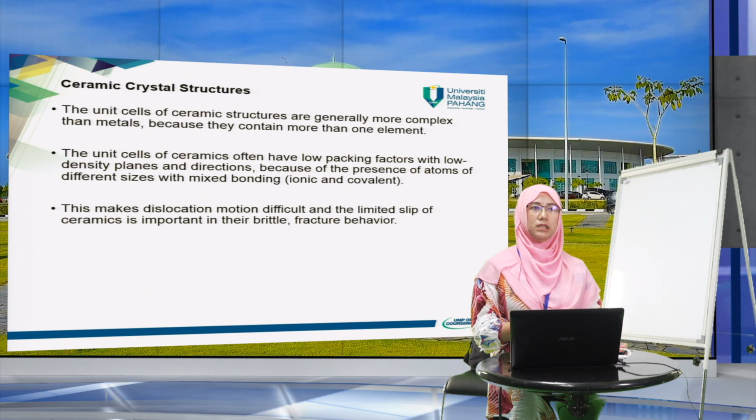As for the ceramic crystal structures, the unit cells of ceramics are generally more complex compared to metals, because they contain more than one element. The unit cells of ceramic often have low packing factors with low density planes and directions because of the presence of atoms of different size with mixed bonding, ionic and covalent. So this makes dislocation motion difficult, and this limited slip makes ceramics brittle.

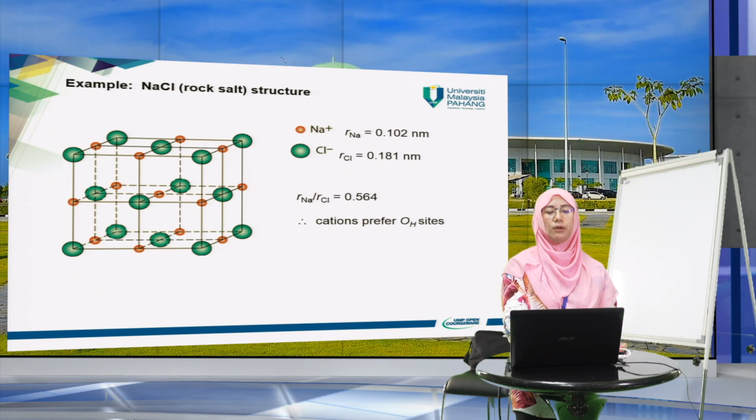Okay, this is an example of the sodium chloride structure. As you can see here, we have two different types of atoms in the unit cell. Another example, we have calcium fluoride, with cations in cubic sites, and also perovskite, a complex oxide. As you can see, we have three different atoms in the perovskite.

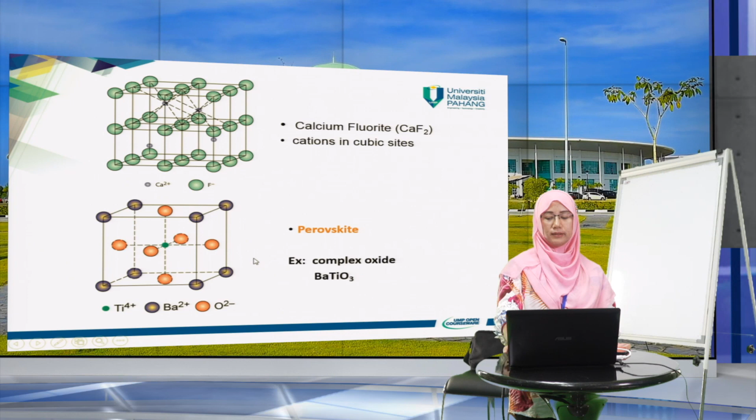General properties and applications of ceramics. Ceramic is brittle, has high strength and hardness at elevated temperature, but low thermal and electrical conductivity. They are sensitive to flaws, defects, and surface or internal cracks. So in ceramic materials, the cracks grow through grains.

Ceramics fail by brittle fracture without the formation of necking or any plastic deformation. The process of brittle fracture consists of the formation and propagation of cracks through the cross-section of materials in a direction perpendicular to the applied load.

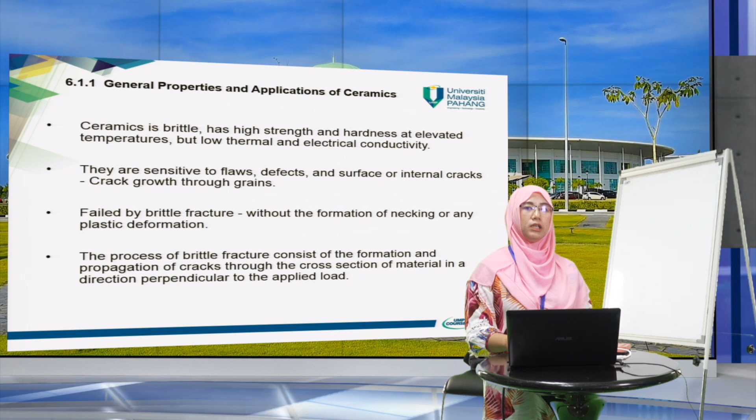Types of ceramic, properties and applications. Oxide ceramics: there are two major types of oxide ceramics, alumina and zirconia. Alumina, also known as aluminium oxide, is the most widely used oxide ceramic. It has high hardness and moderate strength, and is used for electrical and thermal insulation and in cutting tools and abrasives.

Zirconia, also known as zirconium oxide, has good toughness and good resistance to thermal shock, wear and corrosion. It has low thermal conductivity and a low friction coefficient. It is used for dies for the hot extrusion of metals and zirconia beads.

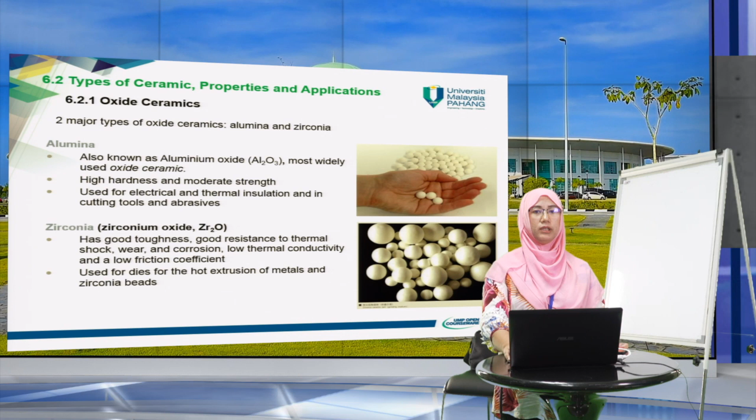Silicate ceramic. Silicates are primarily composed of silicon and oxygen, the two most abundant elements in the Earth's crust. The bulk of soils, rocks, clays, and sand come under the silicate classification. The most simple silicate material is silicon dioxide, also known as silica. So we have oxide ceramics, and we also have silicate ceramics.

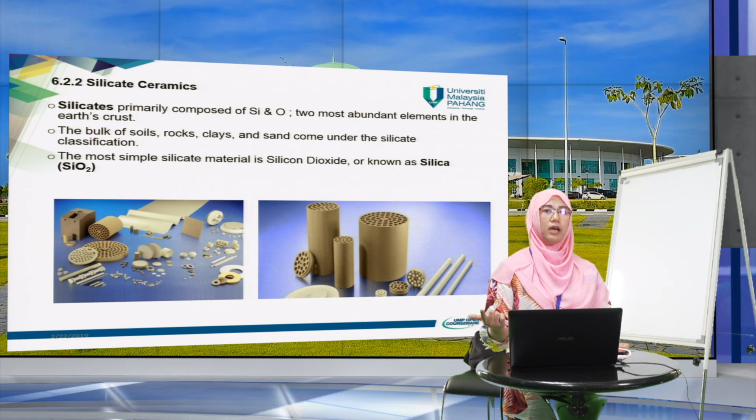Glass, yeah? Glass we categorize under silicate ceramic. Glass is a solid substance with an amorphous structure containing at least 50% of silica. Physically, it is hard, brittle, has resistance to electricity and heat transmission as ceramics, but is usually transparent. So glass has a smooth, non-porous surface which is resistant to chemical attack.

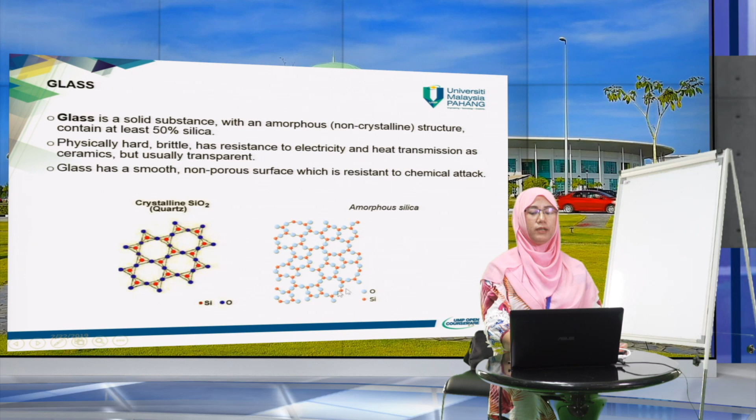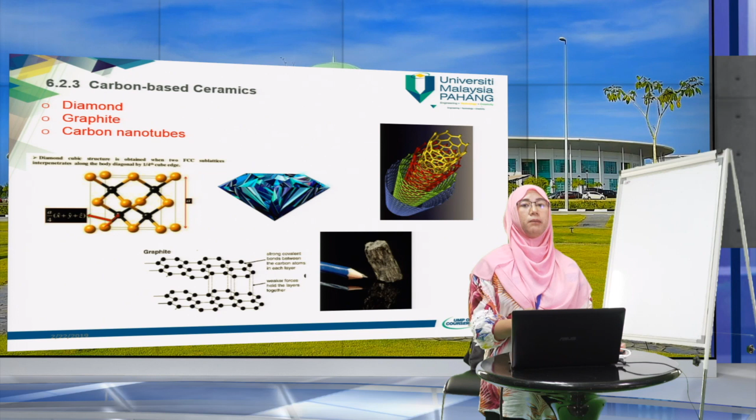Okay. We also have carbon-based ceramics. We know that carbon is one element, but it is an earthen element. It is an earthen material, so we include carbon in ceramic categories. Okay, carbon-based ceramics. We have diamond, graphite, and carbon nanotubes.

Okay. Diamond is a principal form of carbon with a covalently bonded structure. It is extremely hard, low electrical conductivity but high thermal conductivity. It is transparent to visible light and has numerous important applications such as cutting tool materials, abrasives in grinding wheels, dressing of grinding wheels, and dies for drawing wires. Diamonds also we use.

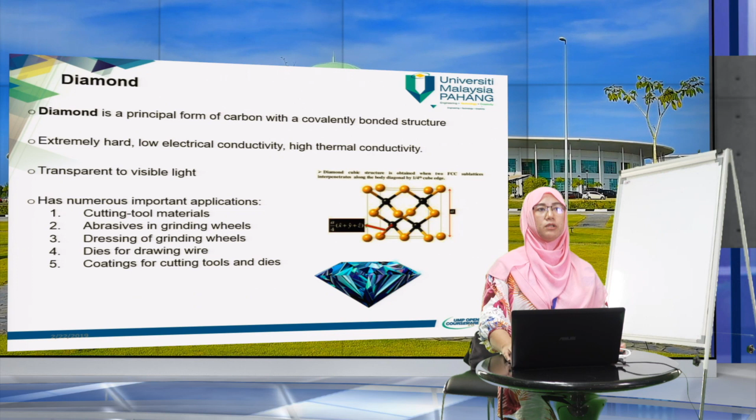Graphite is a crystalline form of carbon having a layered structure with close packed carbon atoms. It is more stable than diamond at ambient temperature and pressure, but it is weak when sheared along the layers. Graphite is brittle, has high electrical and thermal conductivity, and good resistance to thermal shock.

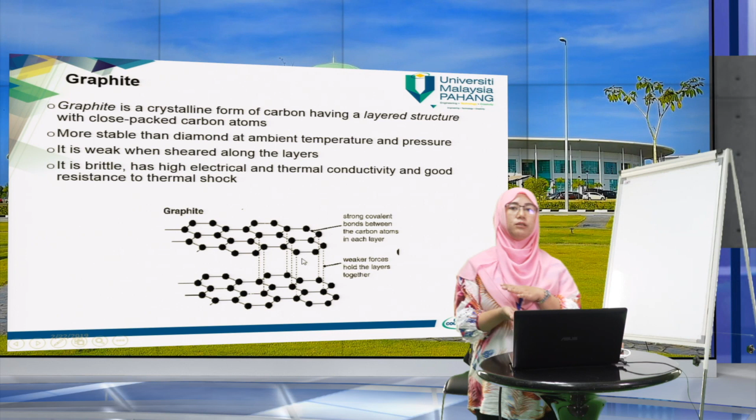So if you see the atomic arrangement in graphite, it has strong covalent bonds between the carbon atoms in each layer, but at the same time it has a weak force holding the layers together, and thus the graphite is more slippery. So overall, graphite has good electrical conductivity parallel to the hexagonal sheets.

Carbon nanotubes are tubular forms of graphite. They have high strength and are used as a reinforcement fiber in composite materials. They also have high electrical current carrying capability, and can be made as semiconductors or conductors.

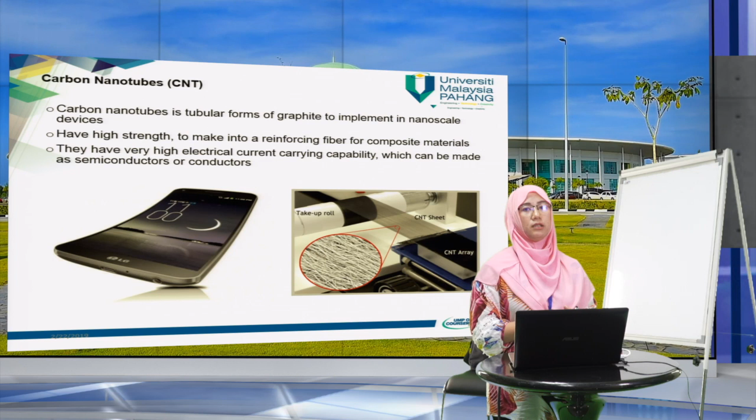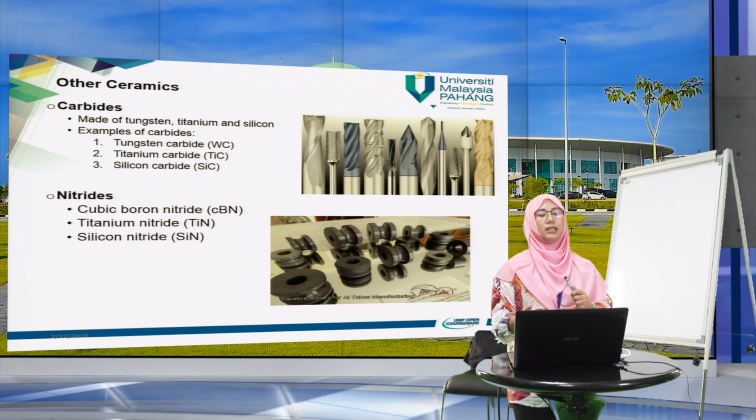Other types of ceramic, we have carbides and nitrides. Carbides made of tungsten, titanium and silicon. Examples of carbide ceramics, we have tungsten carbide, titanium carbide and silicon carbide. We also have nitride ceramics. We have cubic boron nitride, titanium nitride and silicon nitride.

Overall, general properties and applications of ceramics. Ceramic is brittle, has high strength and high hardness at elevated temperatures but low thermal and electrical conductivity. They are sensitive to flaws, defects and surface or internal cracks, and the cracks grow through the grains.

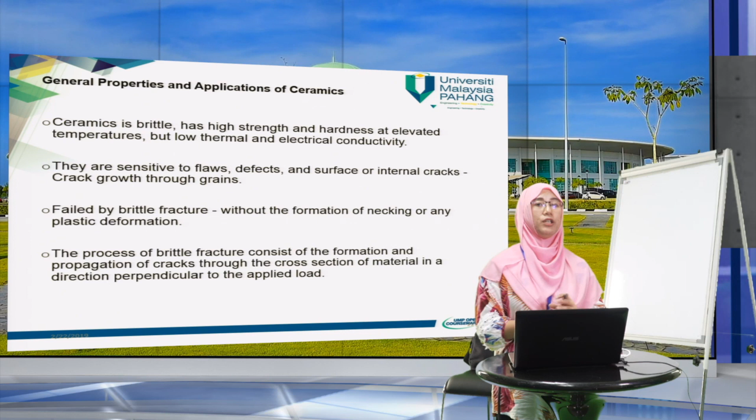Ceramics fail by brittle fracture, which occurs without the formation of necking or any plastic deformation. The process of brittle fracture consists of the formation and propagation of cracks through the cross-section of material in a direction perpendicular to the applied load.

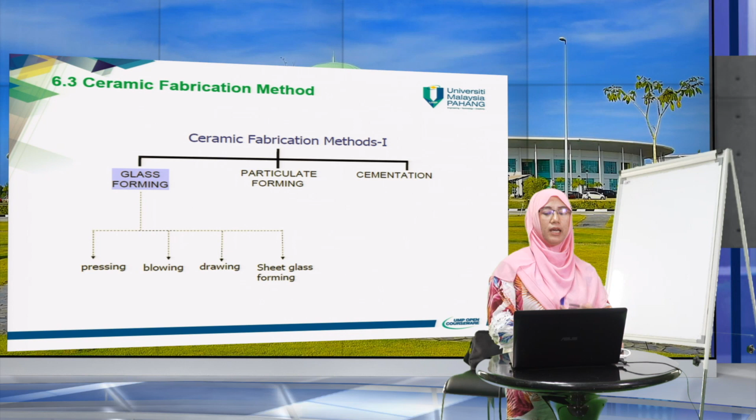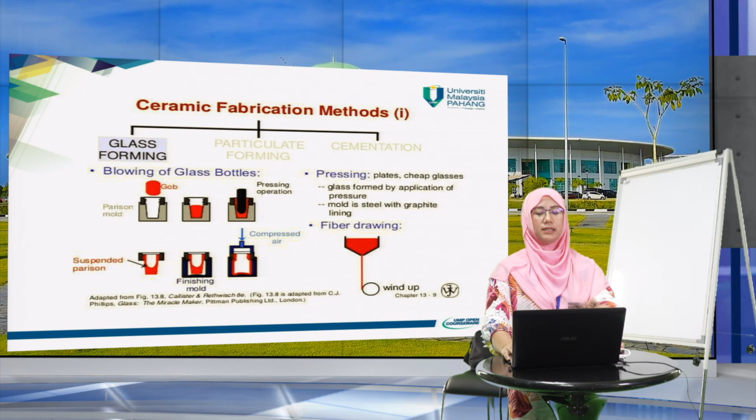Now, ceramic fabrication methods we can divide into three: glass forming, particulate forming and also cementation. Glass forming, we have pressing, blowing, drawing and sheet glass forming. This is an example of glass forming, yeah, blowing of glass bottles, pressing and also fiber drawing.

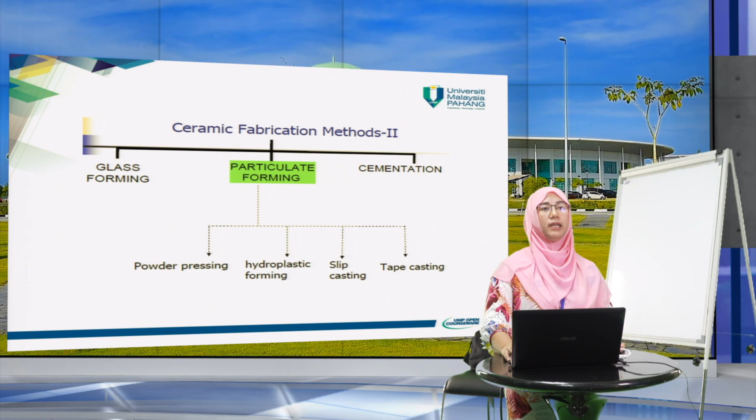Then we have particulate forming: powder pressing, hydroplastic forming, slip casting and tape casting. This is an example of particulate forming. This is the example of slip casting. Okay, one of the particulate forming methods, we have slip casting.

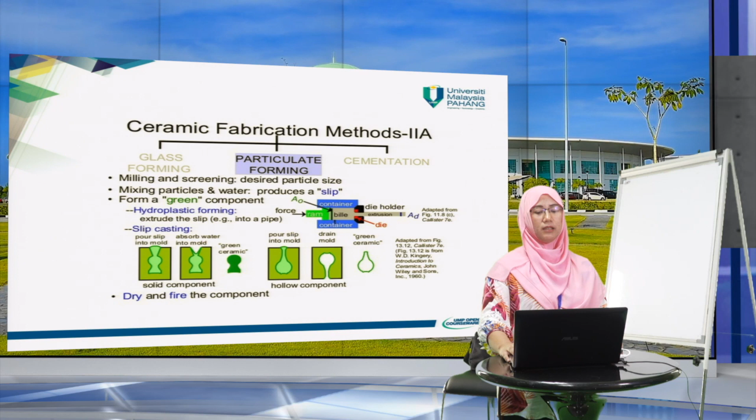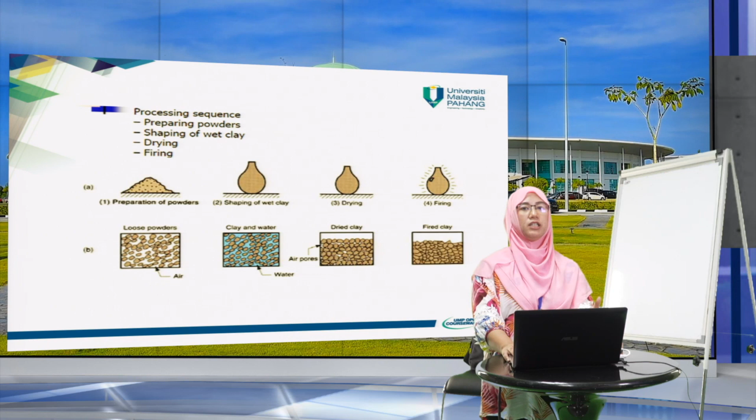Okay, what we do is the processing sequence: we prepare the clay, then shape the wet clay, dry, then after that firing. So why do we need to dry and then fire? Then we have a good traditional clay ceramic.

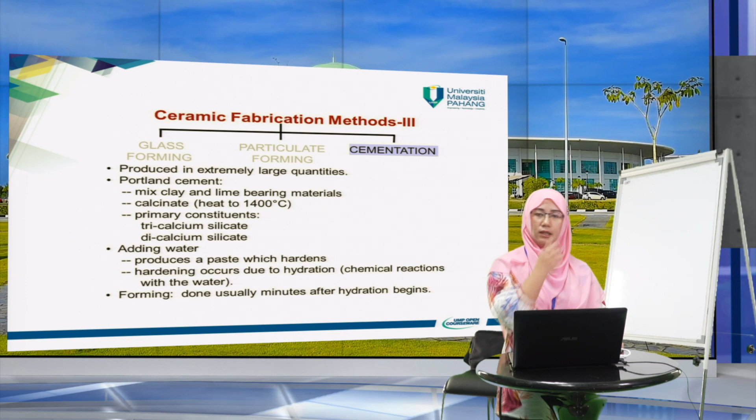Third, we have cementation. Normally cementation is a fabrication method of ceramic to produce extremely large quantities of ceramic, yeah? Portland cement. Applications of ceramics. Example, we have ceramic knives, made of zirconium oxide. The advantages of ceramic knives: high hardness, wear resistance, chemically inert, do not stain, lightweight and easy to use.

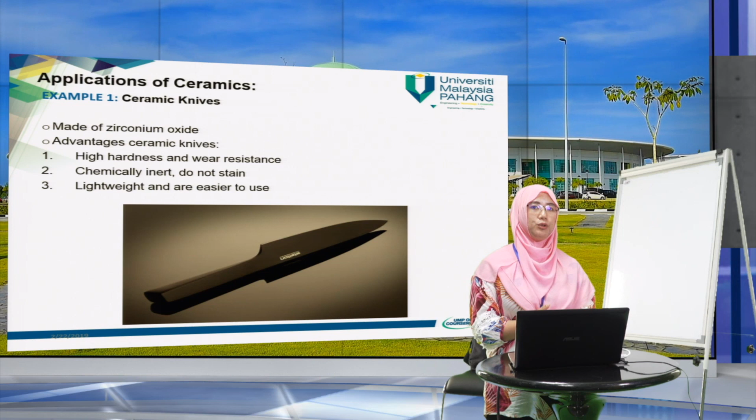Another example is ceramic ball and roller bearings. We use them at high temperature and high speed. So now we know that ceramic materials are not only limited to traditional ceramics, but we also use and modify ceramic materials for advanced engineering materials.